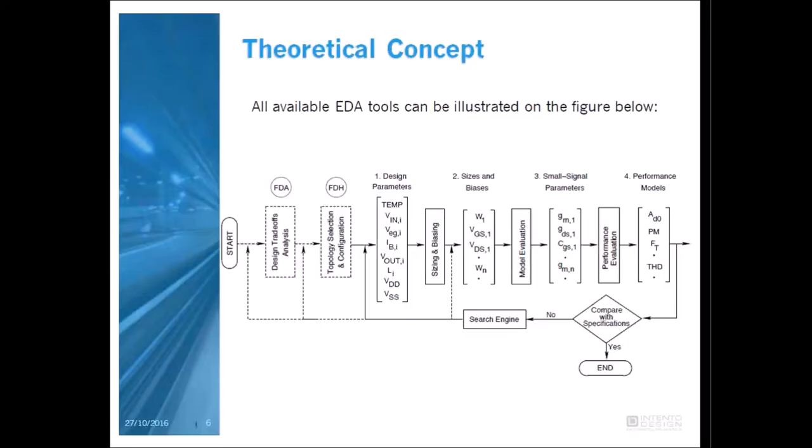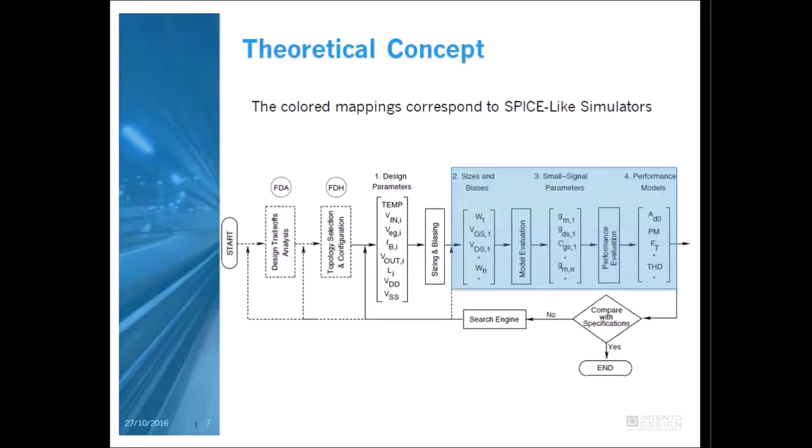We will try to classify all the EDA tools that are on the market today on this diagram. For example, we have here the SPICE-like simulators. All kinds of simulators today are the mapping from vector 2 to 3 to 4. This is the SPICE simulator: we take widths and polarization and we get performances. People followed this model from the late 80s to develop what we call simulation-based optimizers. They took these 3 vectors, put an optimization engine around them, and came up with the simulation-based optimization concept. We see Neolinear in the history, we see Analog Design Automation, and many other examples.

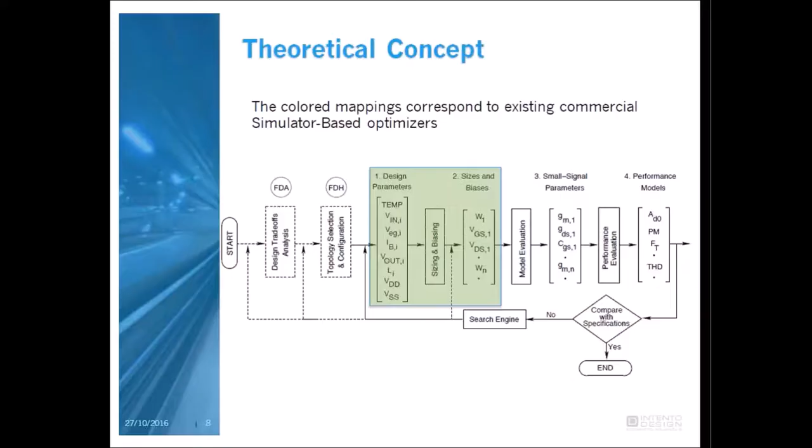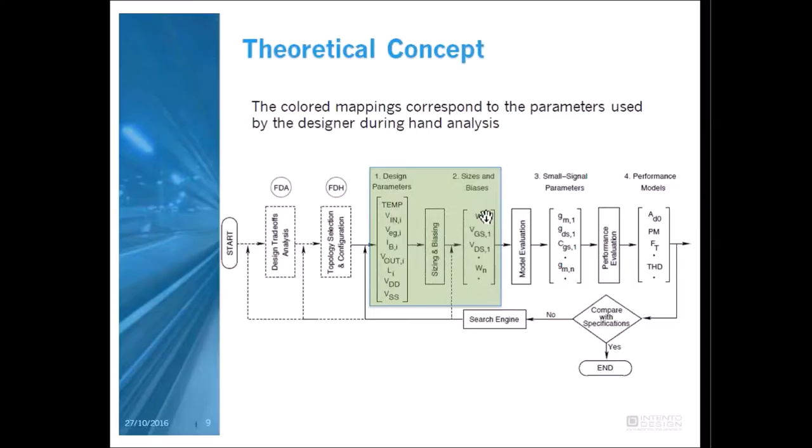But the point is, in the next slide, the designer, when he does hand analysis, uses these 2 vectors only. He starts with the design parameters, and then he does something called sizing and biasing. He writes some equations, gets the sizes and biases, and then continues. Up to date, we found that there is a lack of automation in this step. Nobody thought before about automating this step. And this is why we don't have real analog design automation tools.

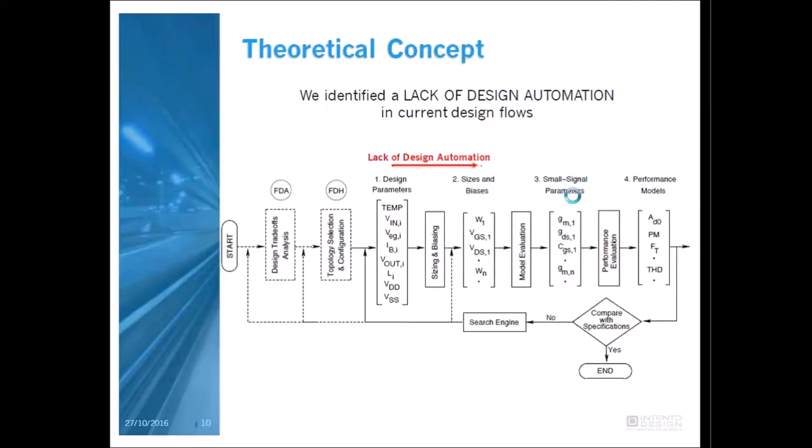What we did actually is come up with a methodology to automate this mapping, and we are able to automate the whole flow for analog design. We came up with an interactive tool which is very fast in sizing, which is deterministic, it's not really optimization, which is correct by construction, and we can really target speed and accuracy. So how did we do this?

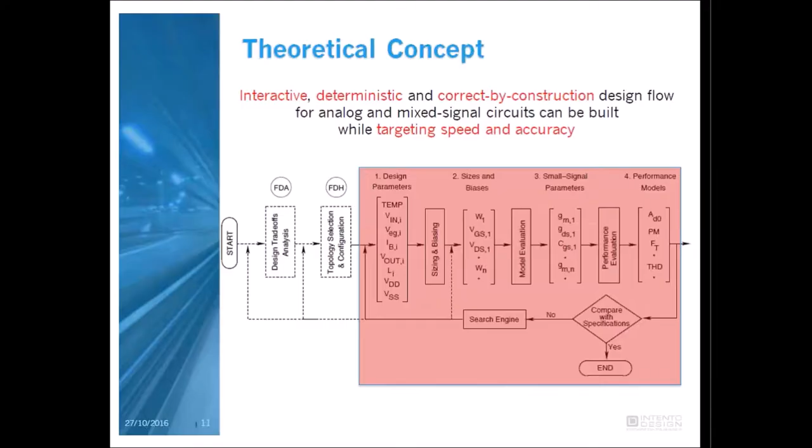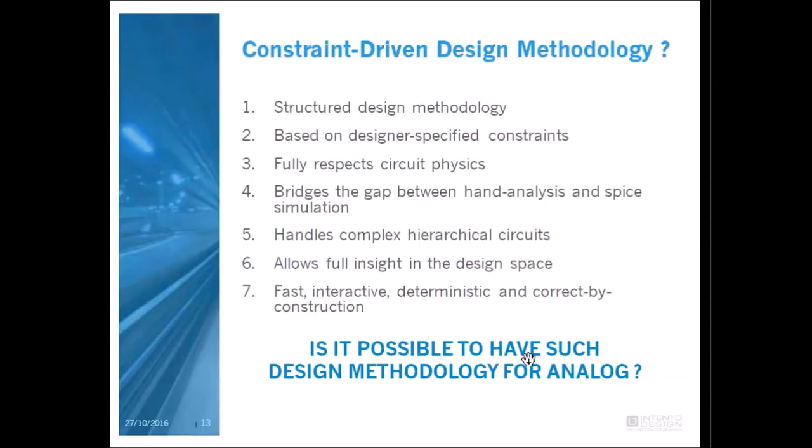We developed a constraint-driven design methodology, and we imagined that this methodology should be a structured design methodology. It should be based on designer-specified constraints, and it should fully respect circuit physics. It should bridge the gap between hand analysis and SPICE simulation. It should handle complex circuits, and it should allow full insight in the design space, graphically, for example. And as a result, we will have a fast, interactive, deterministic, correct-by-construction tool. Is it possible? Yes, it's possible through our product.

We came up with a product called ID Explore that will take the unsized OpenAccess database schematic. It will take a set of constraints like design, technology, and performance constraints, and the designer will specify the set of parameters he would like to control on the schematic, on each transistor.

And out of this, our software is guaranteed to create what we call a structured design graph. We will assign to each transistor a primitive. This primitive, you can see it as the logic gates in the digital domain. So this is the equivalent primitive for analog.

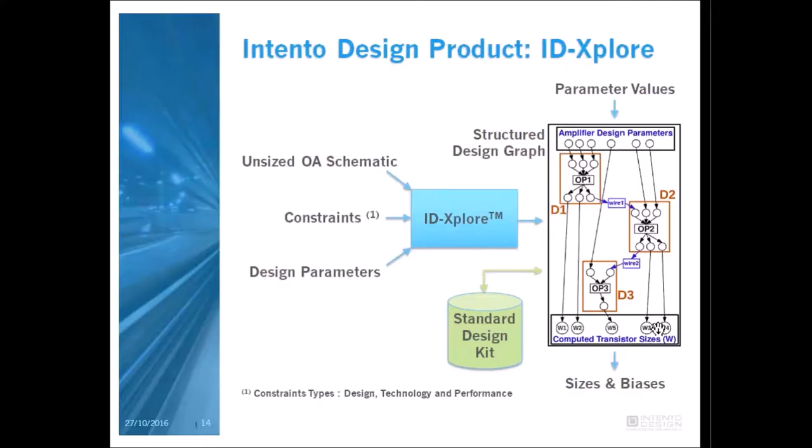But the point that we discovered also is that this model is the same for all technologies. If you have the same design parameters, we'll always have the same model. We need only to switch the design kit that is integrated directly for these primitives to size the same IP for a different technology. So let's say we can generate this model only one time in the history of the circuit, and then we use it in different technologies.

So I will give a real example. This is the Miller OTA amplifier. We have set design constraints. We would like to eliminate the offset here. So we had set some constraints, and we had set some technology constraints on the length and the width of the finger, and we have set some constraints on the performance. And we specify which parameters we would like to control. Some of them are fixed, and some of them are variables.

And this is the real graph that we get in memory. So we have these design parameters here. These were on the table. And for the current mirror, we assign a primitive. For the differential pair, another primitive. For the biasing current, another primitive, and so on. And we connect them based on the constraints the designer had set. And we come up with the widths on each primitive here. This is the width, the width, the width, and so on.

So this graph has lots of properties. Among them, I would say that this is the design viewpoint of the designer. I mean, the designer has specified a set of parameters. He got this graph. But if another one has changed the parameters, he will get another graph. He will not get the same graph.

So in this approach, there is no convergence problem, because we managed to always converge on each of these primitives. We have a mathematical approach where we are only using monotonic functions. We are resolving two problems in analog, but both of them are linear. And this way we don't have a convergence problem. But we have another type of problem which is called the coherency problem.

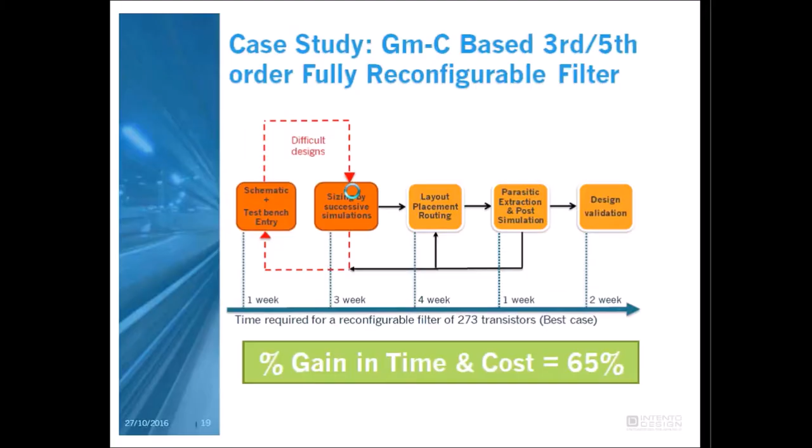So the 3 weeks here vanished. Instead of 3 weeks, you got 1 day, because the graph was scanned very quickly. And then we added 1 day for the design constraints that we have added. So we had a gain in time and cost of 65% in the first design phase. If we compute for the whole flow, it will be around 30% gain.

We applied the same technology in analog migration. So instead here of 1 week getting everything done, we came up with an idea of a constraint migrator. It will take the knowledge of the source OpenAccess and translate it to the database of the target technology. And then the 1 week has vanished also. So we gain 90% in the first phase of the migration. And for the whole flow, it will be also 30%.

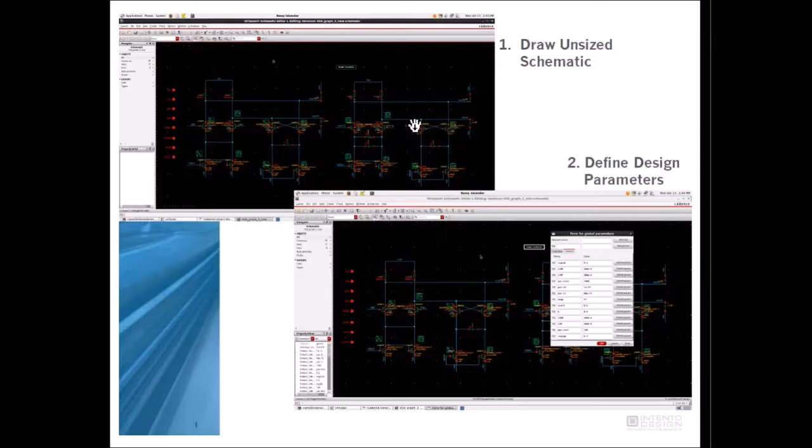So I will show some snapshots of ID-Xplore, how it looks like. It's maybe not very clear, but this is a VGA, a client case, a variable gain amplifier in a transceiver. There is a channel connected in the differential input here, and then the VGA should compensate the channel loss. So we added some symbols here. These are the annotations that we add on the schematic as the constraints.

For example, here we defined a set of global constraints, global parameters on this symbol. And then we map this set of parameters on each design, for example on each transistor. For example, we need to match these 4 transistors together. So we will select all of them, and we will set the same constraint for them. We have what we call a reference transistor, which will be sized and biased, and the rest of the transistors will inherit all the characteristics from this transistor. So we can set very quickly the constraint graph.

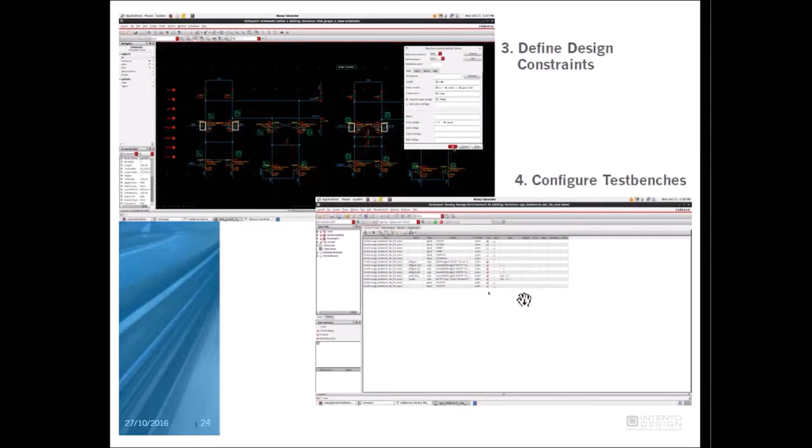And then once we are done with this, we just go into ADE XL. We specify some constraints and some objectives. Once we are done, we save everything in the OpenAccess database, and then we move to our ID-Xplore. We have a library manager. We open, we select the design. We check parameters, which means that we build the graph in this step. If the graph was well designed, all the parameters will be checked. Once we generate the graph, we get the list of parameters here. We select some of these, and we select some minimum and maximum for the design range.

And then in the second phase, we just press the button import. It will fill out this table automatically. We will import all the constraints from ADE XL and fill this table. We also choose the simulator. Now we are 100% compliant with Spectre. We will choose the design kit through a file, and we will set some technology constraints here. This is the finger width that we would like to apply on the whole design, on all the transistors. And we can modify maybe some values here.

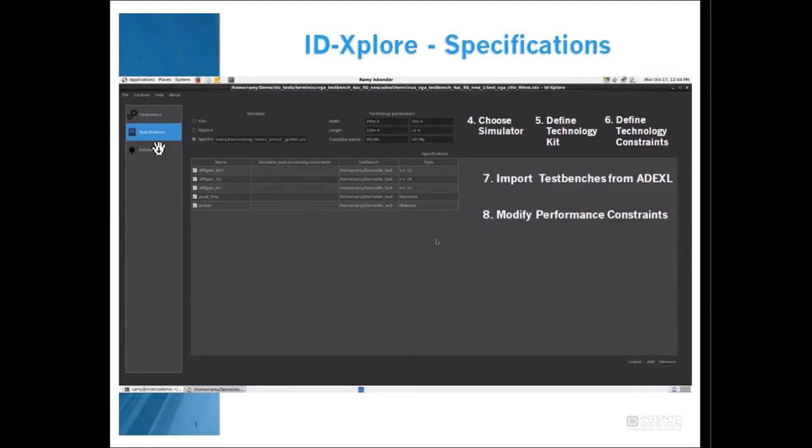And when we are done, we just launch our ID-Xplore engine. We have the full mode, the global and local mode. Global means that we ask the simulator to give us the best 10 solutions in the design space. So it displays the best 10 solutions, okay? And it's up to the designer to interact with these solutions.

For example, he would select this one and do a local refinement. So he will get, for example, this solution, okay? He can go further and select another solution, and then with local refinement he will receive another solution, and so on. But the idea here is that this solution, for example, was not fully satisfied.

We have here 2 red constraints, but we expect after the local refinement that the solution is refined. Once we select this one, we get the widths and the number of fingers for each transistor, and then we back annotate directly to the Cadence environment, in the schematic, and we can simulate with ADE XL.

But the closing point here is that when we simulate with ADE XL, we have to have the same results as here on the specs. If we don't have the same results, it means that something went wrong in the flow. So once we are done with this step, we are sure that everything is okay, and we have successfully designed the analog IP.

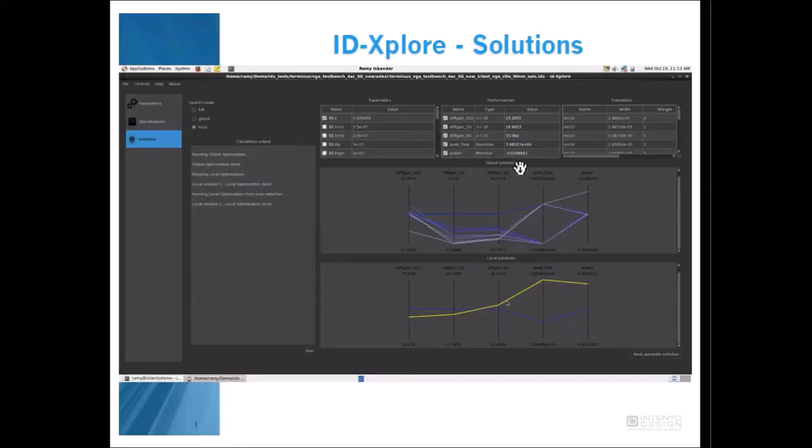So what are the features? There are benefits for companies. We can reach 60% of cost and time saving. We have a fast time to market. We allow more business opportunities. And we protect the IP portfolio of the company. And we can standardize exchange between design teams, and the analog IP becomes an interoperable entity actually.

For designers, we hide all the technology details. We saw some designers looking into the design kit to maximize the effective mobility, to get the maximums, but these kinds of things with PVT fall down, they don't work. So we feel that the designer should not go deep into the design kit. We automate all the tedious work, and we have a GUI designed to have the minimum intervention of the designer. Once we are out of Cadence, nothing can be changed.

I would like to say also that today we are fully compliant with existing design environments. It's fully compatible with OpenAccess. And we have a linear scalable multi-core search engine. We can deploy the sizing on several cores at the same time, and this is transparent for the designer. There is nothing to do. We detect the number of cores and we deploy it on all the cores.

And the most important is that we are compatible with all design kits and with all types of devices, like CMOS, SOI, LDMOS, and FinFET, and we can do FD-SOI also. Thank you.

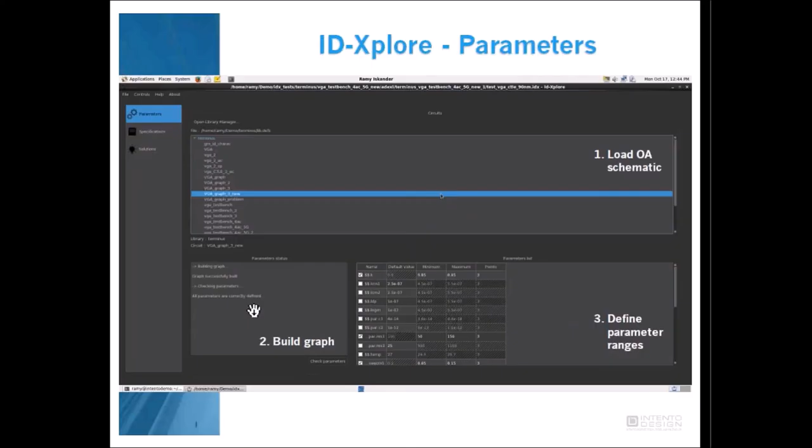I have a question if no one else does. In the case you're over-specified, that's a trade-off to runtime, I assume? No, over-specified means that the designer gave more information than usual, so there are conflicting hypotheses, and we tell him. Where in the flow do you get that feedback? We report it here. I will show you an example.

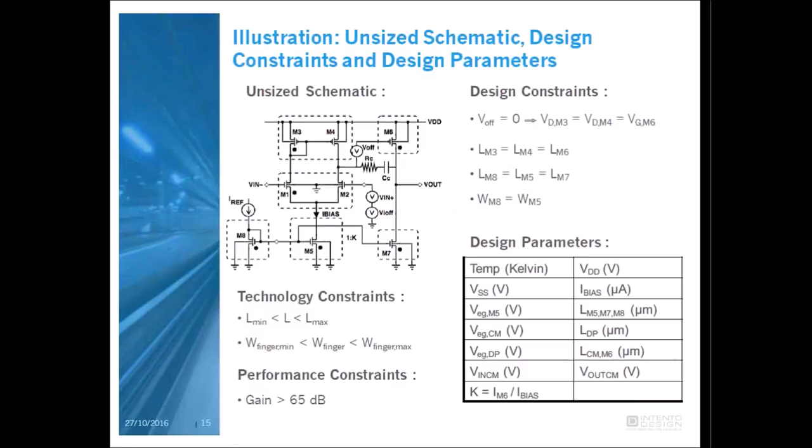For example, if you would like to have an offset voltage here which is not equal to 0, it means that the potential here and here will be different. In this case, we report to the designer that there is an excess, because he has specified, for example, VGS different than VDS, and we tell him you have to remove one of these two parameters to be compliant with the design. Or you have to generate an input offset voltage.